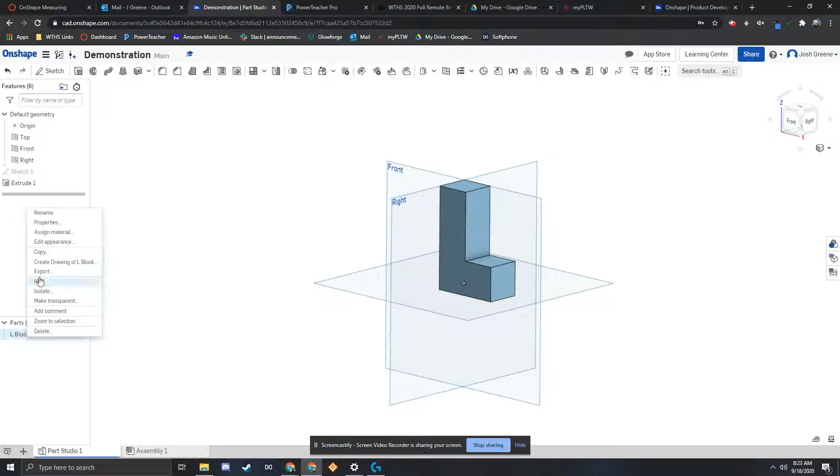Next, I want to change its appearance. So I'm going to go back to that name, L block, right click on it, and go edit appearance. I'm going to select blue from the default color palette, and I'm going to hit the green check mark. So now I've got my block named and it's blue.

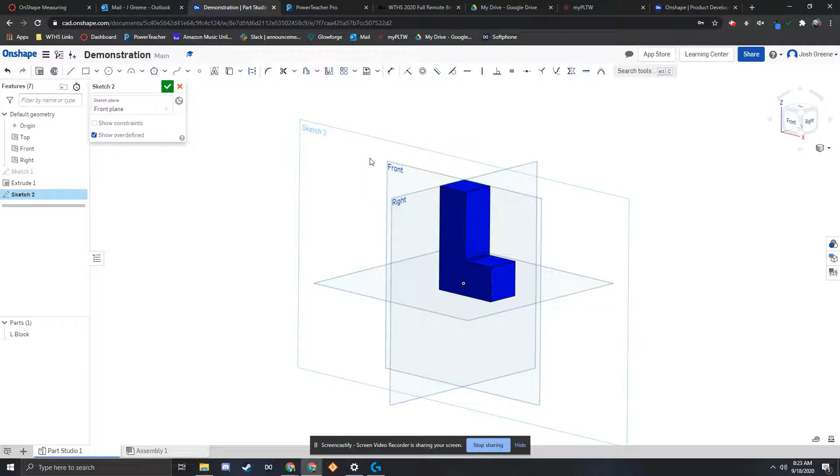Next, what I want to do is start to create some of the other parts in the same space. So to do that, I'm going to create a new sketch, and I'm going to select the front view. Now I want to view the front view, so I'm just going to right click and go normal to, and I can see this straight on now. I'm going to zoom in a little bit.

My next one's going to be the rectangle block. So I'm going to go off here to the left in space, and I'm going to draw a rectangle that's roughly 2 by 2, and I'm just going to click.

You can see here that the bottom number is encompassed by like a box. That allows me to actually directly input a dimension. So I'm going to hit 2 and enter. And that goes to the left-hand side, this dimension, that's 2. So I'm going to do 2, enter.

So I got the size of my box, but you can see that each of the lines are still blue, and that means that they are not constrained appropriately. I can still actually move this box around, which I don't want to be able to do. I want to get it in one spot so it doesn't move.

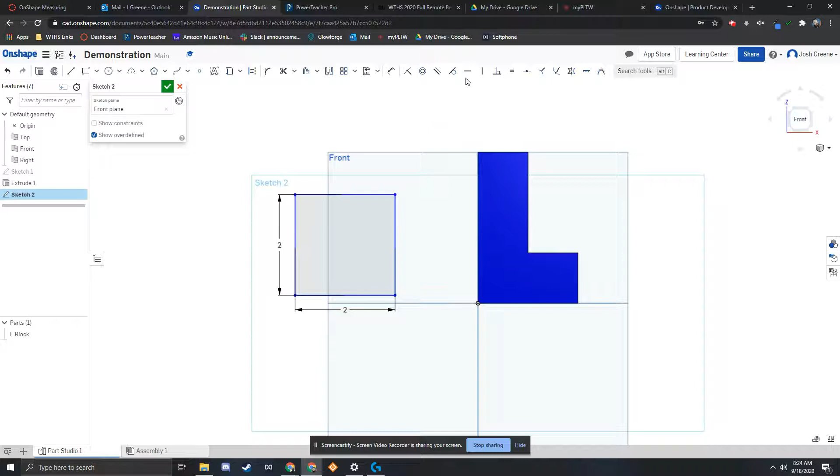So the first thing, to make it nice and easy, I'm going to line up all the bottoms. To do that, I'm going to go up to the top where it says horizontal, and I'm going to click horizontal. I'm going to click the bottom right-hand corner of this box, and I'm going to click the origin in this case, or I could click any other bottom corner of these objects.

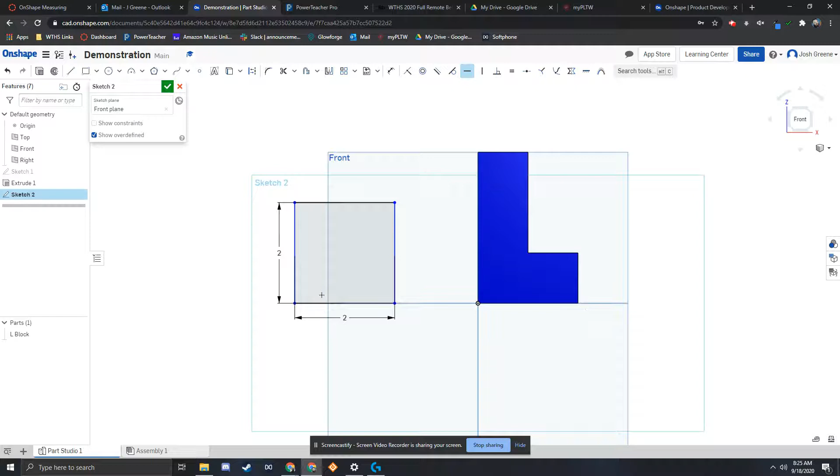So you can see that drops it down to be in line with the x-axis, but 2 of them are still blue. And that's because I can still move it left and right. Can't move it up and down anymore, but I can move it left and right.

Now, I'm going to select dimension, or D, on your keyboard, and I'm going to dimension from this line or this point, so this line or this point, back to either a line on the object or that origin point. And you can see here it puts a dimension between those.

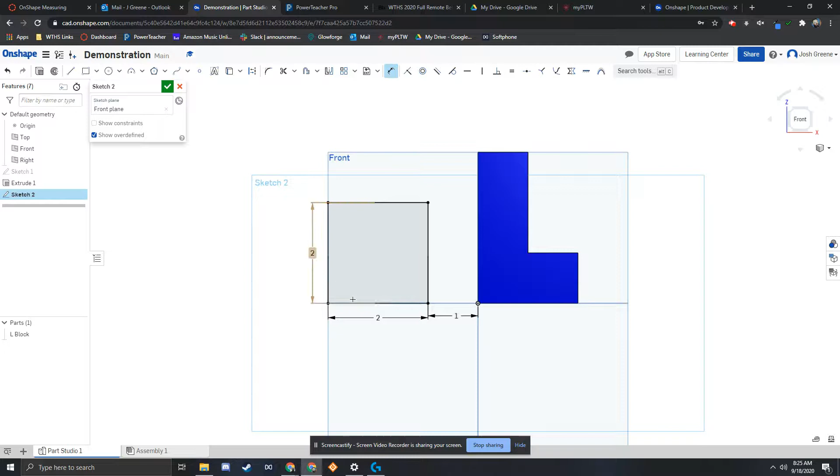I'm going to click, and just for the sake of being easy, I'm just going to put a 1. Now you could put 0.5, I'm just putting a number so they're kind of equally spaced, and all the lines are now black, meaning that they're constrained. So I'm going to go ahead and hit the green check mark.

On the right-hand side, I'm going to click this little box and click isometric. I'm going to go up to extrude.

And what I want to make sure I have in extrude is that it's under new, because this is going to be a new solid making a new part. I'm going to click inside my rectangle, make sure that the depth is 1, and I'm going to hit that green check mark. Now you can see here it says I have 2 parts, and the second one is called part 2.

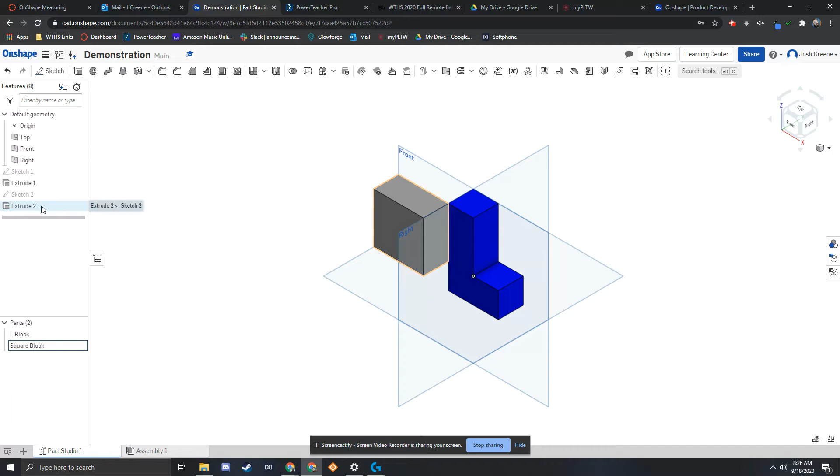So I'm going to right click on that, and I'm going to rename that. This is the square block. On it again, edit appearance, make it red, green check mark.

So now I have 2 of my 5 parts I need, and you can continue building the other parts the exact same way. Hopefully that helps.